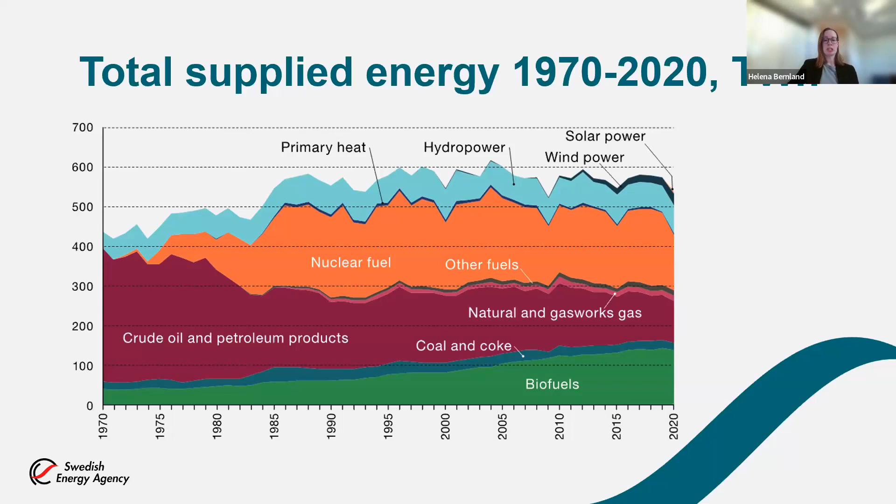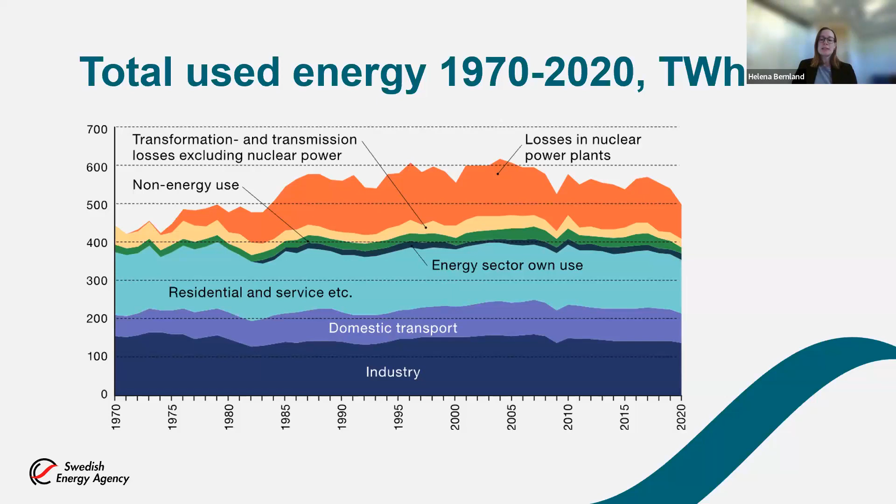As for the different sectors, in the transport sector, we still have a big challenge phasing out petroleum products. Biofuels have helped a lot, but we see it is in the electricity sector, electrical vehicles and charging stations, that will be the success story in the future for phasing out petroleum products in the transport sector.

As for industry, I mentioned biofuels is a good source of energy. In the next decades, we are transforming our heavy industries like the steel industry into becoming driven by electricity instead. You might have heard of big projects like Hybrit and H2 Green Steel. This means we will need to produce a massive amount of electricity in the next years, so that is the challenge for us. But doing so, we will be able to really phase out fossil fuel consumption in heavy industries.

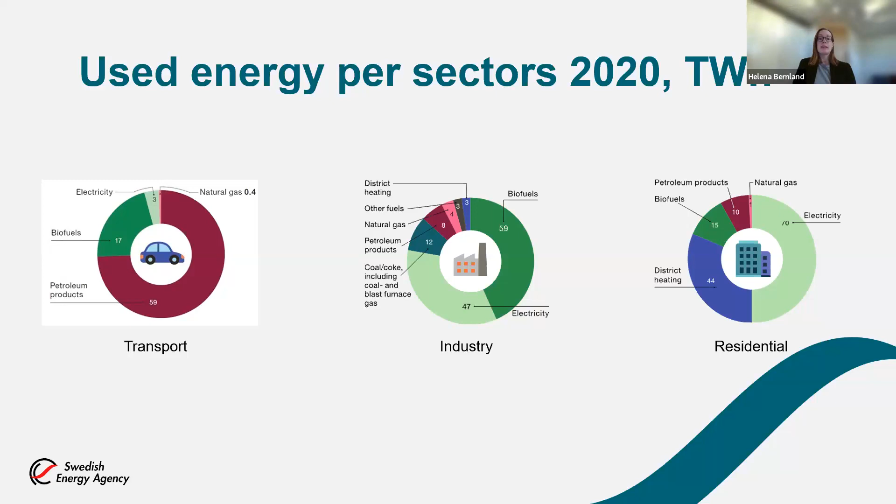As for the residential sector, for quite a while we've been able to let go of most petroleum and natural gas consumption. Instead, we have a pretty solid district heating system, which I'll give you more insights on in a bit. We also use a lot of electricity to drive heat pumps, but also, as is common in the rest of Europe, quite many households now install solar panels to be self-sufficient on both heat and electricity in their buildings.

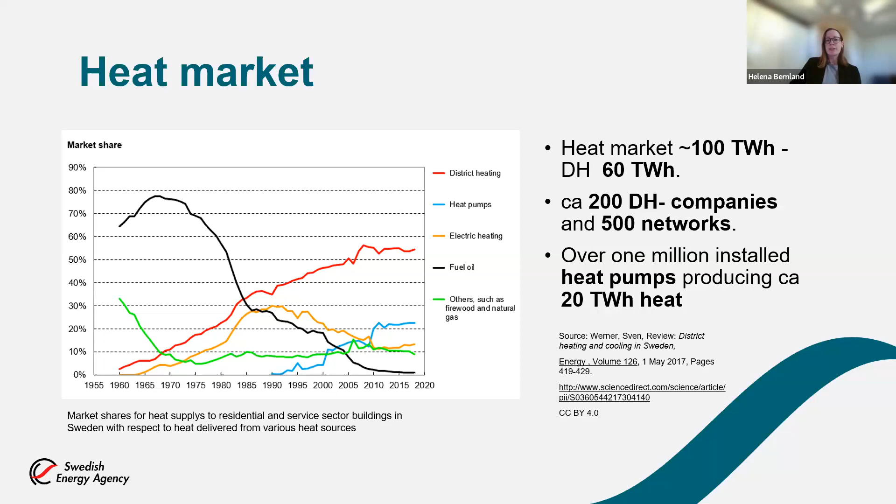What is that and what is the fuel mix? Well, today the fuel mix actually consists of less than 1% fossil fuels. Instead, we use recovered heat from industry, but we also produce a lot of heat for this system by burning municipal waste and by burning waste and residue mainly from the forestry industry, which is quite big in Sweden. And with that, I think I will hand over back to Ludwig.

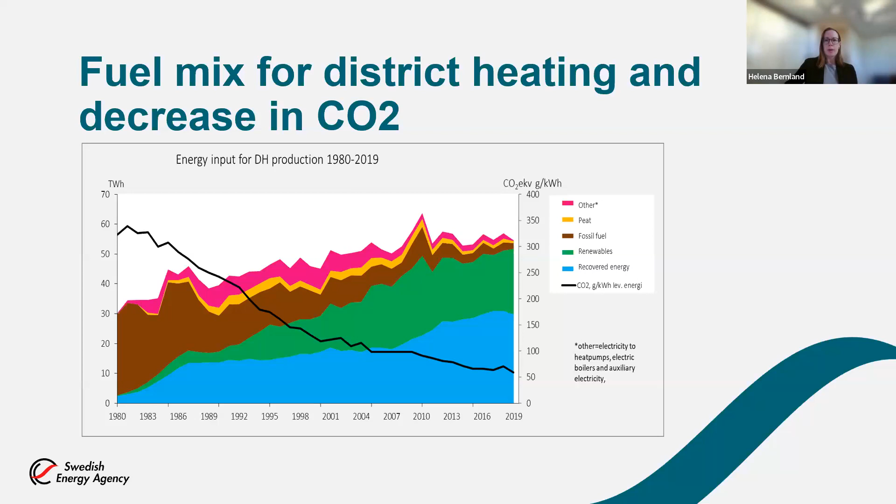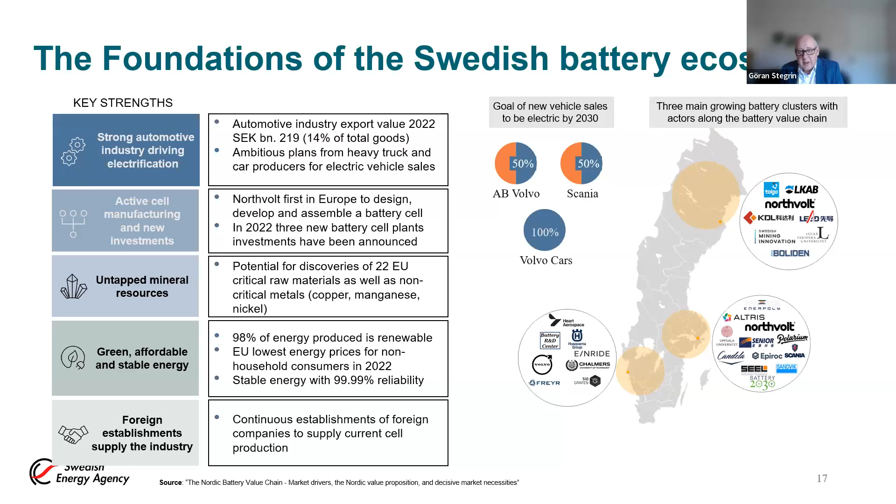We have a quite extensive system of battery players in Sweden, and this slide shows part of the Swedish value chain, going all the way from raw materials to active materials. Here are also international players, Senior for instance—they are from China—but we also have Swedish players. This is Talga, they are an Australian one.

Going all the way to cell manufacturing, we have a big factory up north called Northvolt, and they are planning to expand. But we also have various players, all the way from the big size players to startup companies. We have pack users, we have applications, we have the big OEMs, and we integrate it also into other applications—not always mobility, also used for stabilizing the grid.

Last but not least is recycling. We are dependent upon really reusing the materials in the batteries, so that is also something with a lot of focus on. And in the background we have the authorities like us, but there are also academia—different research institutes working to support the whole value chain.

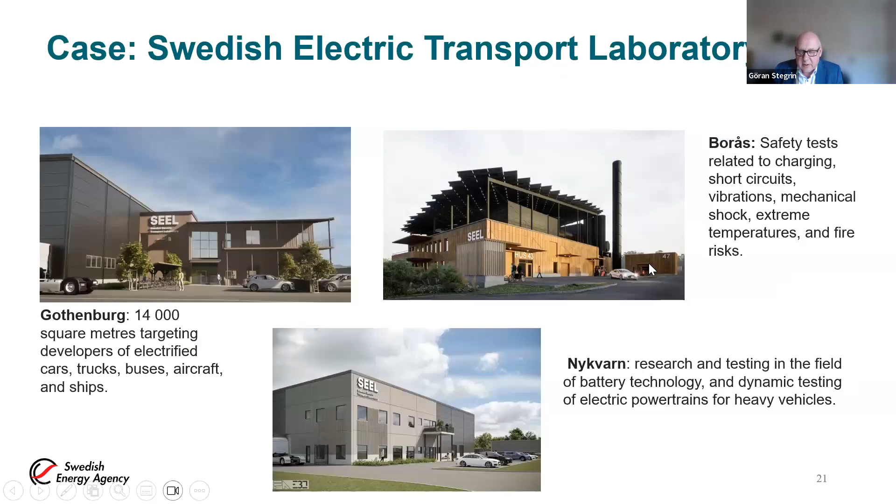So I would like to end with one example, what we're doing close to - sorry, this is a little bit too quick on the trigger. Can we go back? I'm trying to, I don't know what's happening now. That's the slide I'm looking for. What's cooking right now? Okay, hope it's staying like this.

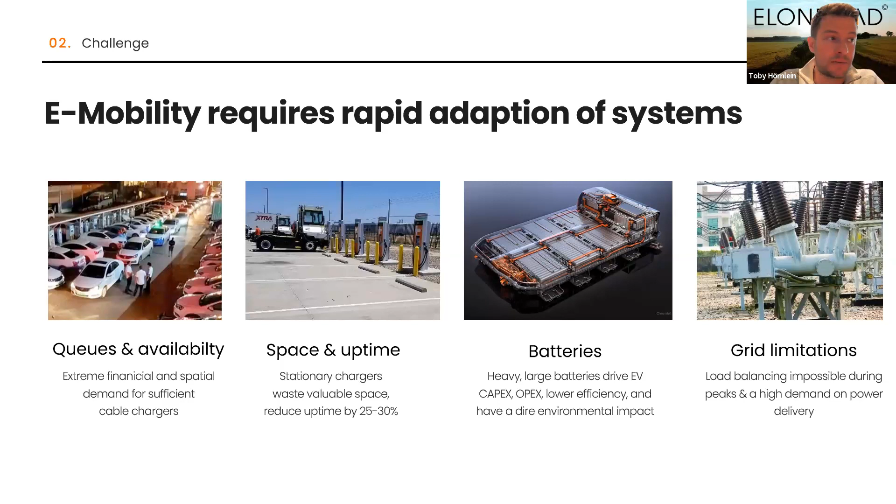The e-mobility transformation that we are embarking on has a couple of drawbacks. We have queues and issues of availability with chargers. We have space and uptime problems in commercial sectors because you can't charge cars as quickly as you used to fill them with gasoline or diesel. The batteries are extremely heavy, with a huge environmental impact we have to assess. And we have grid limitations — we cannot, in peak hours, provide the power needed for all the EVs to charge.

How do we go about this? We save time because we integrate charging into the road instead of cables, meaning we can charge cars while they are loading and unloading. We need less space, so it's unobtrusive — it's made to be run over, which is great for commercial actors, and cheap. We can also reduce batteries, which is a really cool point, because if we keep charging vehicles while they're driving, we can lower battery size by about 70%.

This has now been verified by a lot of independent research. We can power manage, distributing the energy actively — we're streaming electricity, as we like to say — which means we get away from peaks. And obviously, we're making it autonomous-ready, because you want a vehicle charging autonomously when it's driving autonomously. In terms of business, we're working with a lot of actors on the market.

Currently we're going in 2 strategic directions developed in parallel. On the right is the motorway/public road approach, and on the left the stationary charging system. In the middle we're working with closed loop systems — a fancy name for cordoned-off areas like airports and ports — which sees a combination of both technologies.

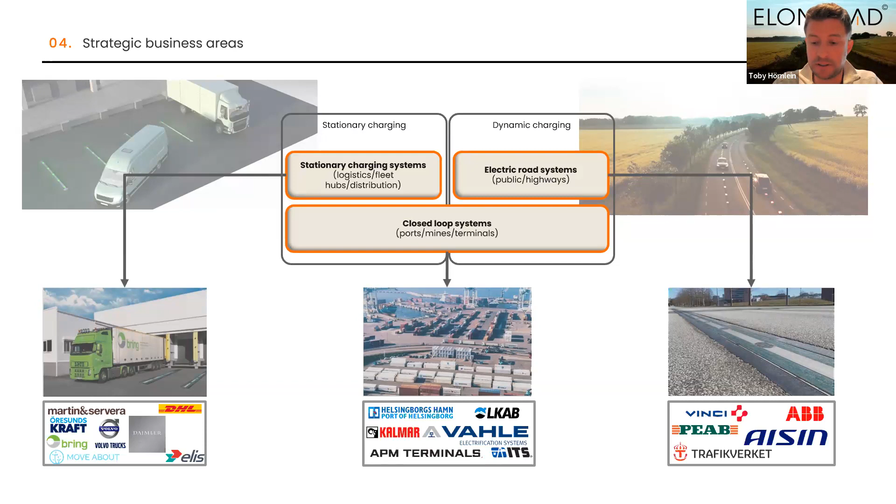I won't go into further detail since time is short, but I'd like to leave you with my contact details — please reach out to me. I look forward to meeting you in real life in Essen, Germany very soon. And I will hand over to the next company, ClimaCheck.

On you go. Klas Berglöf from ClimaCheck. We deal with energy efficiency in air conditioning, refrigeration, and heat pumps — everything that has a refrigeration process.

These systems are assumed to work as long as they're cooling down, but commissioning and maintenance isn't delivering efficiency. In spite of being one of the biggest electrical consumers in the grid — maybe 20% of global electricity used by refrigeration processes, and in many buildings 30 to 60% of consumption — they're not working efficiently, and there are way too many failures.

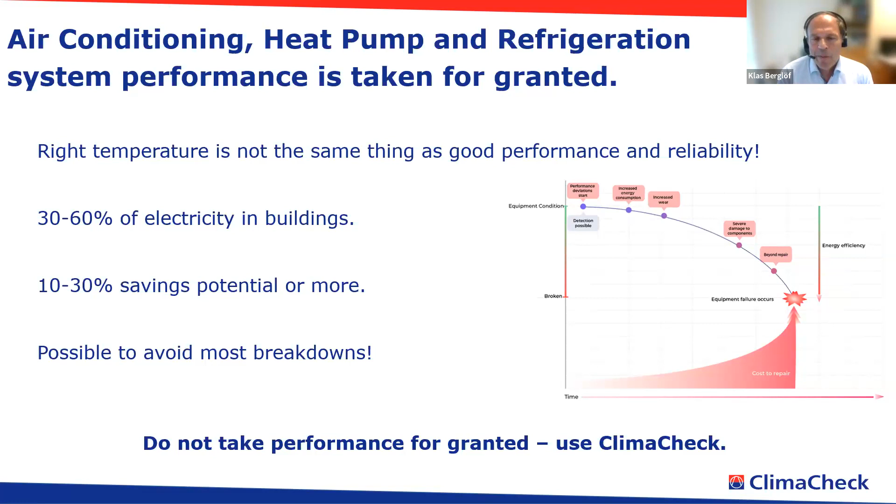In almost all sites, you can save a quarter of the energy by making sure the system is working, and you can avoid almost all the failures that occur without warning. It's much more efficient to address problems as they emerge rather than when they stop the system entirely. And all systems today are monitored.

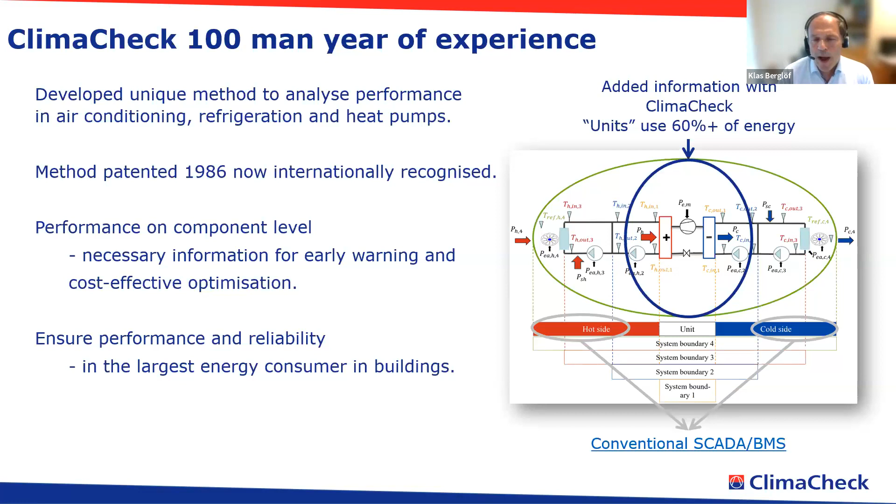There are a lot of sensors in buildings and units, but the information isn't being used. So what ClimaCheck has developed is a method to analyze the refrigeration process. In most systems today, the required sensors are already there — it's a question of collecting the data and running the analytics needed to see efficiency at a component level.

ClimaCheck added a totally new layer of information where you can see the total efficiency of the systems. Traditionally, people have looked at COP, which is a very challenging topic unless you're in a rating laboratory, because COP is changing continuously depending on the load and conditions. So it's not very valuable information to know the COP because it requires such expertise to interpret. Whereas if we look at the sub-efficiencies of the cycle - compressor, condenser, evaporator - you can get an early warning as soon as you have any performance deviation in the system.

Our technology allows us to bring out this information 24/7, or you can connect sensors or connect to existing sensors and have detailed analytics in just a few minutes. So this is changing how systems are being monitored, and it's going to be a basis for predictive maintenance, which is a very high topic today.

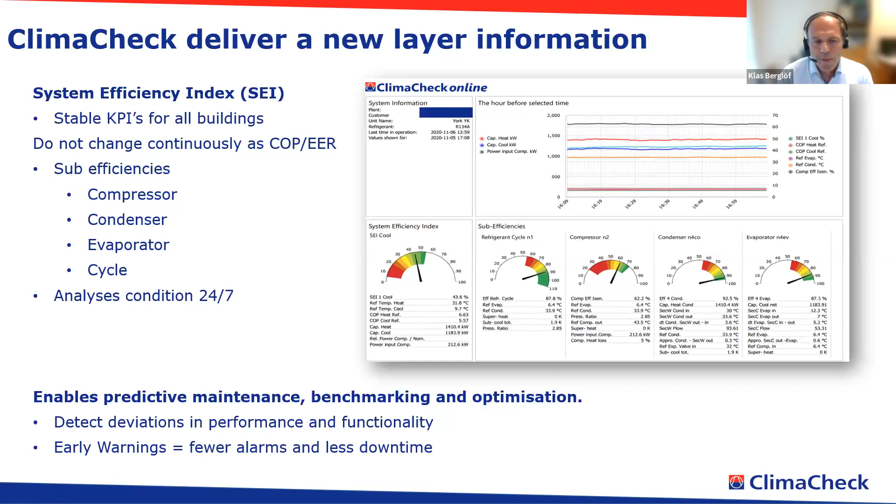This is not a very new method for us. We started in the mid-80s when the method was patented. Today it's recognized by the International Energy Agency, for example. We are right now implementing in Germany a benchmarking platform for the German Energy Agency, and we have long relations with many of the global players. So the method is well proven and available today.

So I look forward to having real life meetings with anybody who is interested in making air conditioner, refrigeration, and heat pump systems more efficient and avoid failures. Thank you very much.

And now I think NODA Intelligent Systems is going to take over with some other technologies.

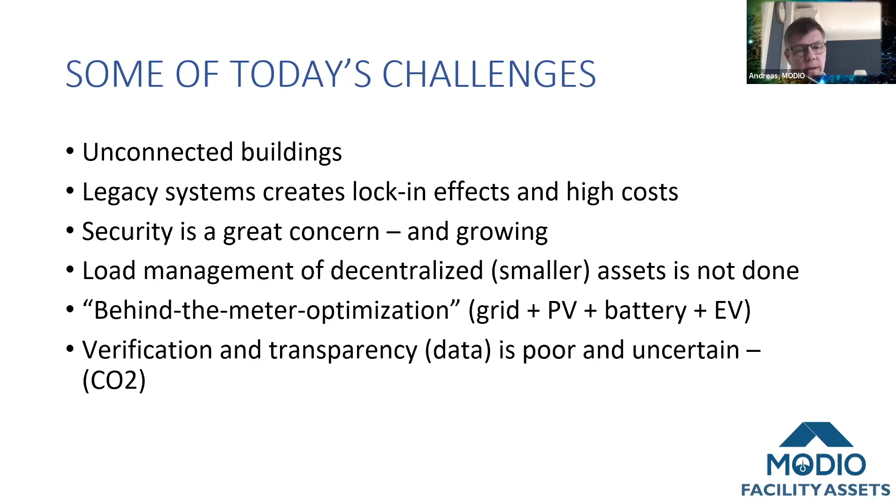And we go to the next slide for this short. So there are buildings and

facilities where we have legacy systems and older protocols that are hard to implement, but it can be done. And we make it possible to have this in a cloud solution. And there are so many IoT systems out there that state the same.

What we are focusing on is making this flexible with open standards and making it possible to store the cloud data on your customer servers, so you don't have to be in some public cloud. You have full control of your data. And we also take the security part very seriously.

So we keep our edge devices out in the field updated with many updates every year, so they get the security holes patched that arise from open source. And it's a thing to build applications on top of it, so we can store data and also control the edges with configurations.

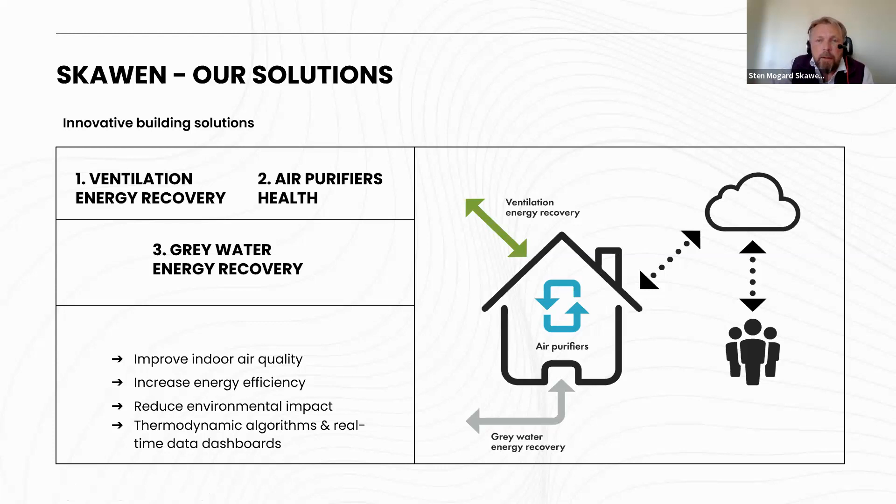And these products that we have are communicating through controllers over to cloud and over to an app, like all the smart homes of today request, and even more the smart cities of the future.

Our competitive advantages, our upside, our USPs. One is our unique mechanical designs that makes our products much lighter, much more silent, and they are very corrosion resistant. Then we have our thermodynamic algorithms, which are very appreciated by our customers.

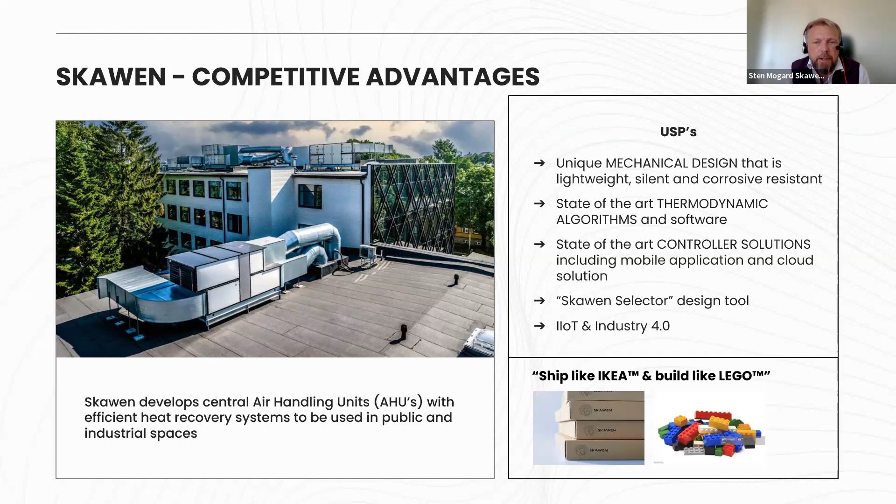We have our controller solutions, which I mentioned, with the cloud solution and mobile app. And then we have a design tool designing all these different units called the Skawen Selector, which is also a cornerstone in our work with industrial IoT and Industry 4.0.

Industrial and public customers we have, and our dehumidification knowledge is also very much appreciated. And then, of course, the industries with aggressive conditions.

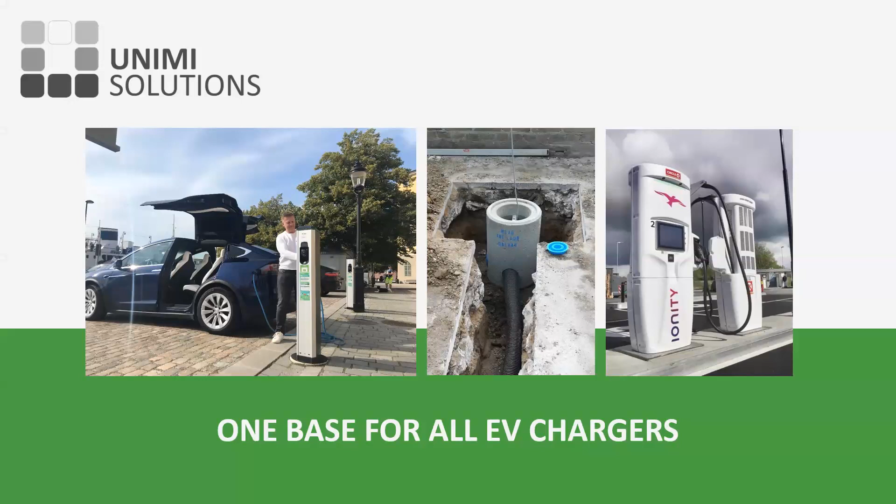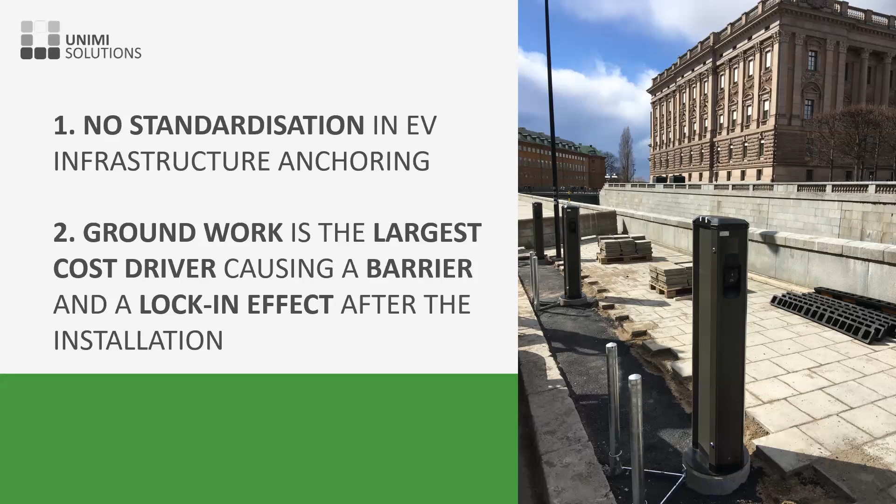As we're now heading into large-scale rollout of EV chargers, the lack of standardization in charger design is a major barrier to introducing this at scale. Groundwork is by far the single largest cost driver for public installation of EV chargers - it can consist of up to 80% of the total cost.

Unimi has been on the market since 2010, which is quite long in this field, making us some of the veterans in this area. We are recommended by charge point operators, installers, hardware manufacturers, municipalities, and so on.

We operate in over 16 different countries with 15,000 unique installations and growing. We're known for very high quality products, delivering projects in different countries on time.

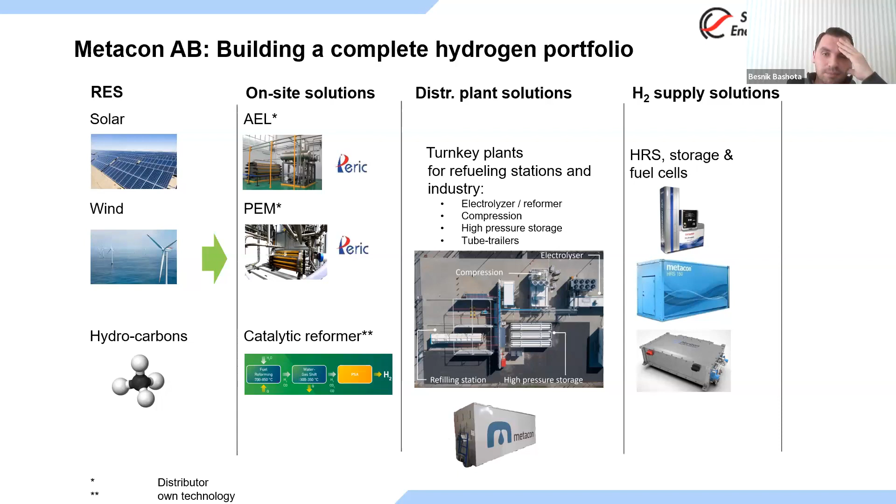The current projects of Metacon - one is at Uppvidinge Vätgas. You will see this here. It's brief and not too technical, but you can see the pictures on this slide.

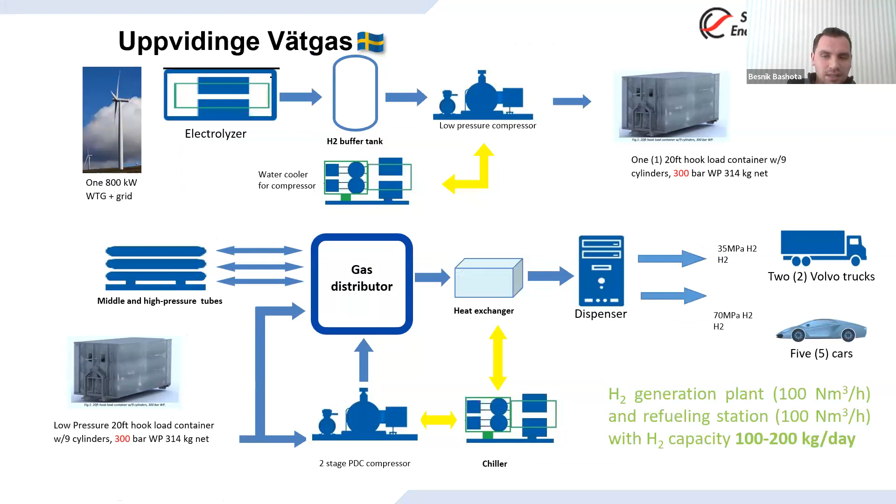And the other project is the Abwasserverband Kempten, which is in Bavaria, Germany. This is my part of the presentation - I can tell you more about it. It's in the field of hydrogen, the Kempten Hydrogen Center.

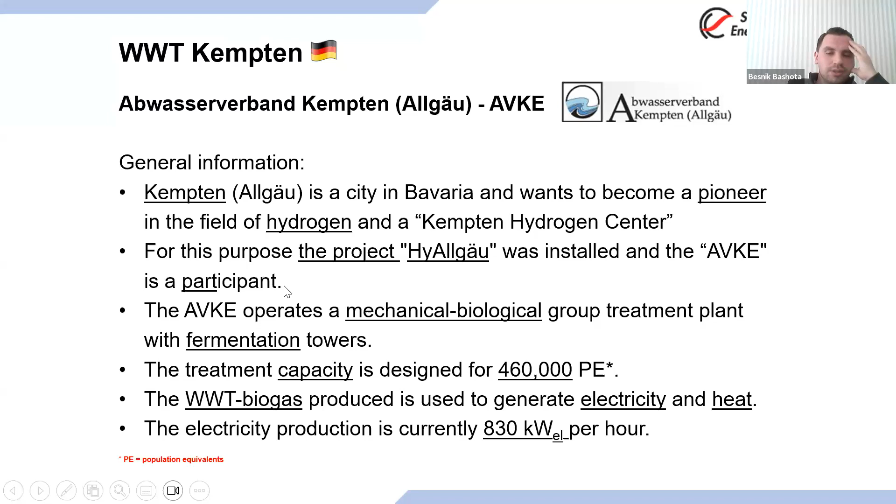For this purpose, the project was installed and the AVKE, as a participant, operates a mechanical-biological wastewater treatment plant with fermentation towers. This complete capacity is designed for 460,000 people, and the electricity production is currently at 830 kilowatts per hour at this point.

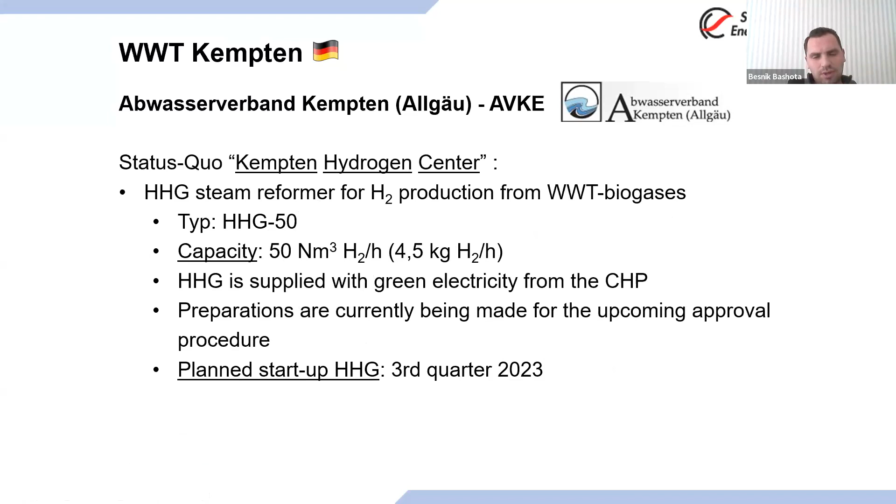The plan started in the third quarter of 2023, I hope - when the Germans are working as well as we are. I'm looking forward to seeing you at eWorld in a few days. Thank you.